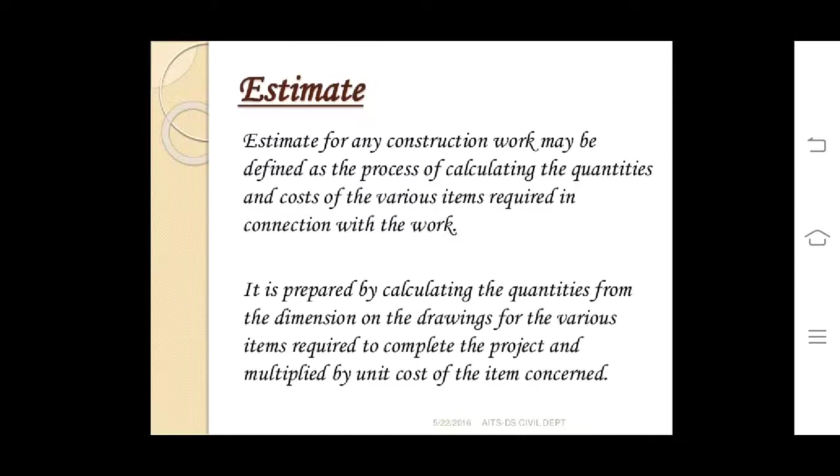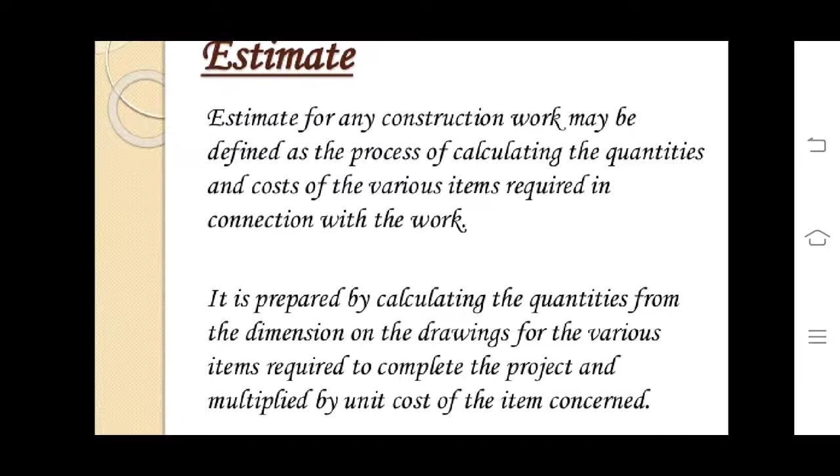Now, as discussed earlier, what is estimate? Estimate for any construction work may be defined as the process of calculating the quantities and cost of various items required in connection with the work. It is prepared by calculating the quantities from the dimension on the drawings for various items required to complete the project and multiplied by unit cost of the item concerned.

Need for estimation. The estimation is needed for ascertaining the necessary amount of money required by the owner to complete the proposed work, meaning it is required for making funds or provision of funds before starting of work.

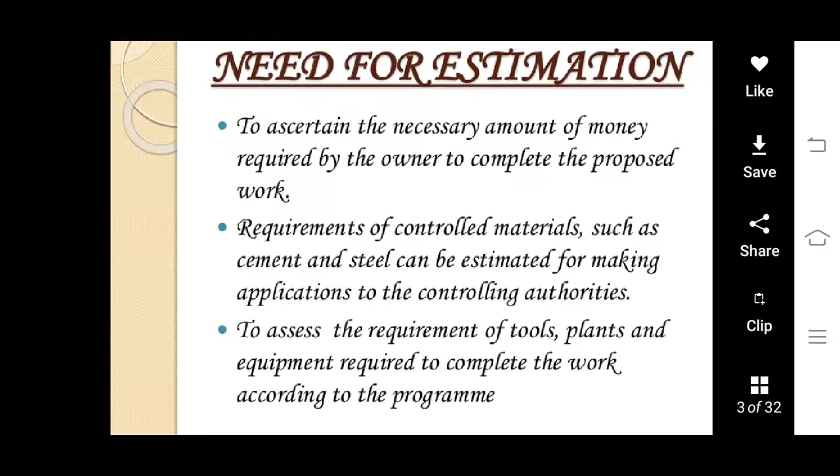Requirements of controlled materials such as cement and steel can be estimated for making application to the controlling authorities, to assess the requirements of tools, plants and equipments required to complete the work according to the program.

It is needed to fix up the completion period from the volume of works involved in the estimation. It is required to draw up the construction schedule and program and also arrange the funds required according to the programming. To invite tenders and prepare bills for the payments, the estimation is most important and plays a very vital role.

An estimate for an existing property is required for valuation. Meaning, estimation is done before execution of work or before commencement of work, and if it is after completion of work or for an existing building, it is called valuation.

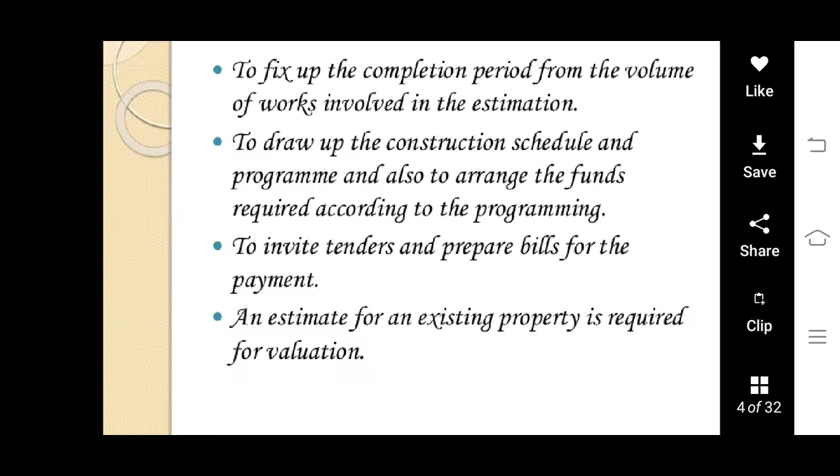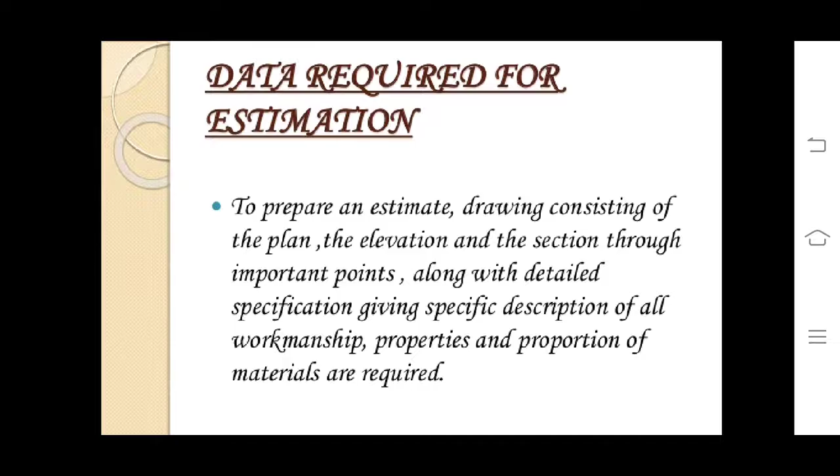Data required for estimation: to prepare an estimate, drawing consisting of the plan, elevation, and the section through important points, along with detailed specification giving specific description of all workmanship, properties, and proportion of material are required.

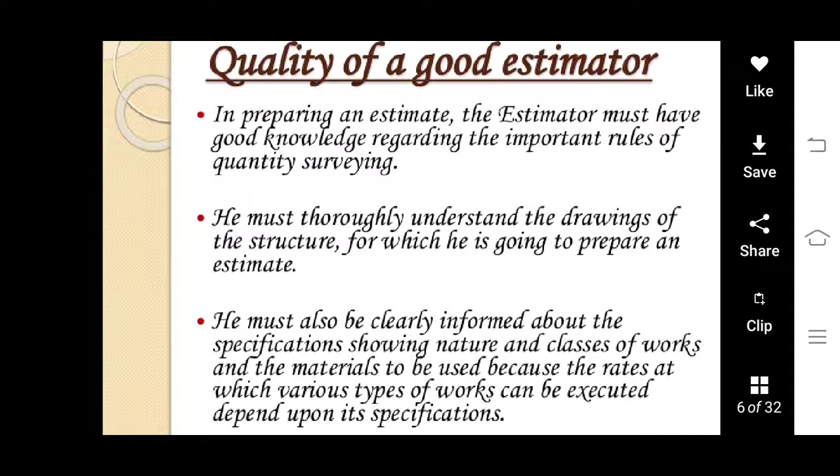Quality of a good estimator: in preparing an estimate, the estimator must have good knowledge regarding the important rules of quantity surveying. He must thoroughly understand the drawings of the structure for which he is going to prepare an estimate. He must also be clearly informed about the specification showing nature and classes of works and materials to be used, because the rates at which various types of works can be executed depend upon its specification.

Knowledge of details of construction work is necessary for the estimator. He should have experience in construction work, having information regarding the materials required, machinery needed, overhead problems, and cost of all kinds of things.

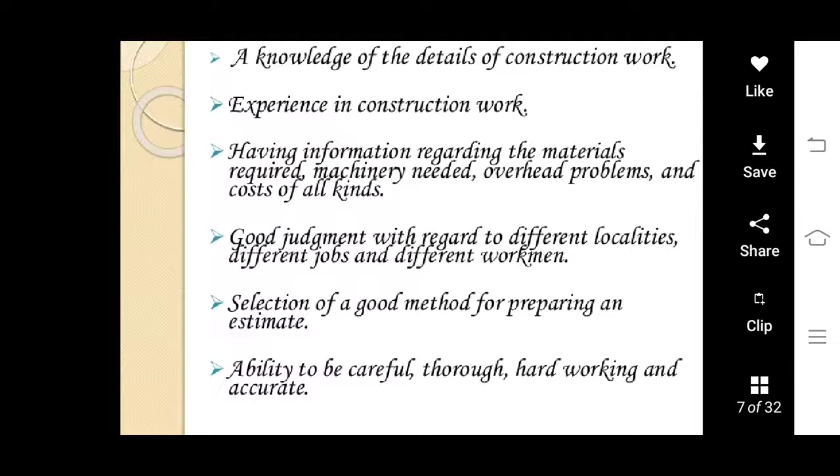The estimator should have good judgment with regard to different localities, different jobs, and different workmen. He should have good selection of method for preparing an estimate. The good estimator should have the ability to be careful, hard working, and accurate.

Before preparing the estimate, the estimator should visit the site and make a study of conditions there. For example, if the construction of a large building is planned, the estimator or his representative should visit the site and note the location of the proposed building.

Get all data available regarding the soil. Make a sketch of the site showing all important details.

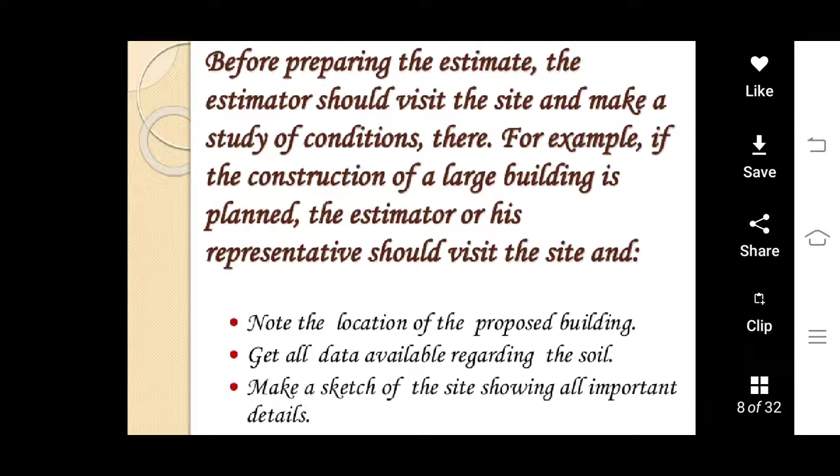He should obtain information concerning light, power, and water at the site. He must secure information concerning banking facilities for project completion.

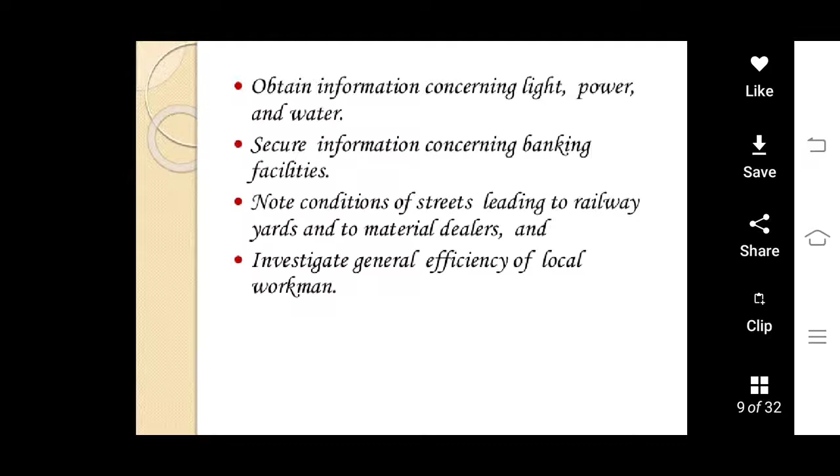He must have knowledge of the conditions of streets leading to railway yards and material dealers, etc. And he has to investigate the general efficiency of local manpower or workmen and availability of workmen and material.

There are various types of estimate, as we have discussed earlier, like detailed estimate, a preliminary or approximate or rough estimate, a quantity estimate, a revised estimate, and a supplementary estimate.

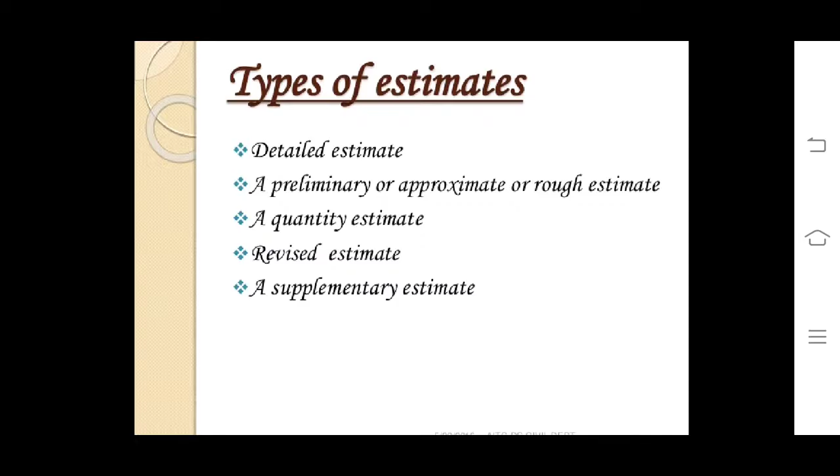Detailed estimate: this includes the detailed particulars of quantities, rates, and cost of all the items involved for satisfactory completion of the project. Quantities of all items of work are calculated from their respective dimensions on the drawing on a measurement sheet, multiplying these quantities by their respective rates in a separate sheet. The cost of all items of work are worked out individually and summarized in it.

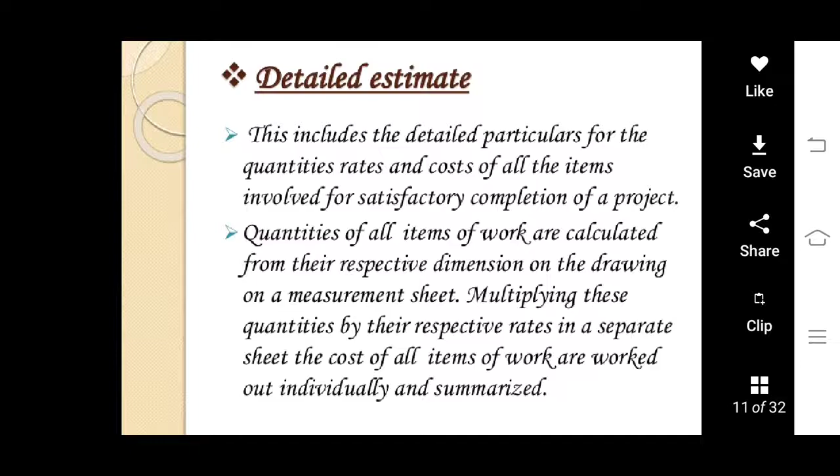All other expenses required for satisfactory completion of the project are added to the above cost to frame the total of the detailed estimate. This is the best and most accurate estimate that can be prepared. A detailed estimate is accompanied by a report, specification, detailed drawing showing plans, different sections, key plans, and basis of rates.

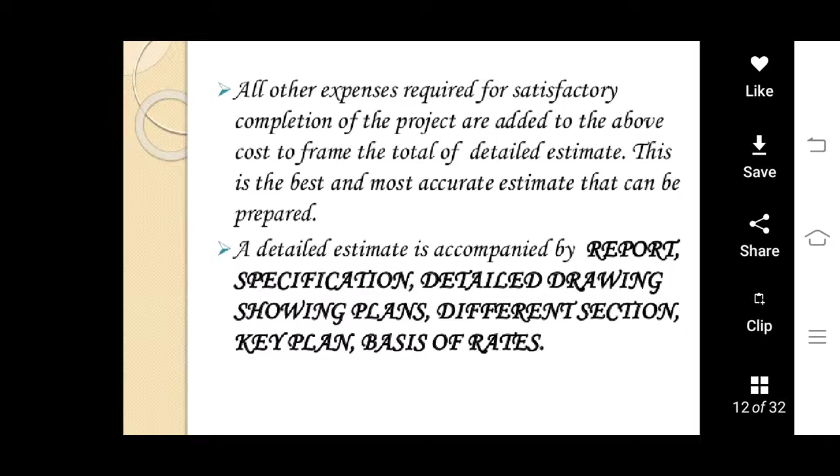Preliminary estimate: this is an approximate estimate to find out an approximate cost in a short time, and thus enables the authority concerned to consider the financial aspect of the scheme.

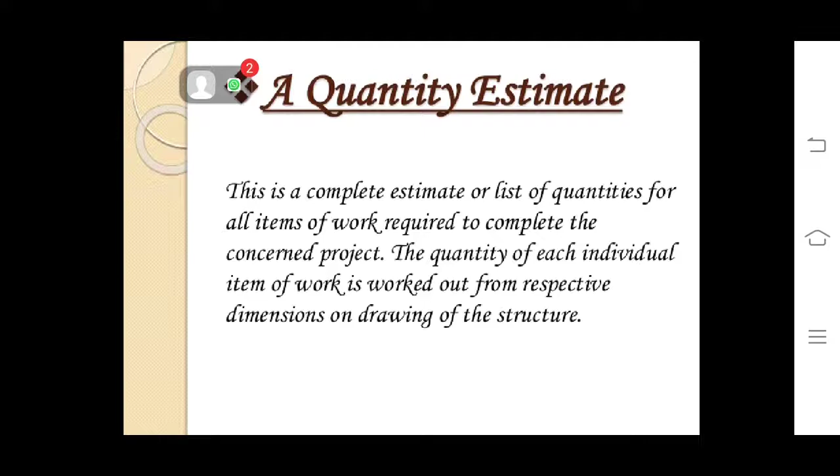Quantity estimate: this is a complete estimate or list of quantities for all items of work required to complete the concerned project. The quantity of each individual item of work is worked out from respective dimensions on the drawings of the structure.

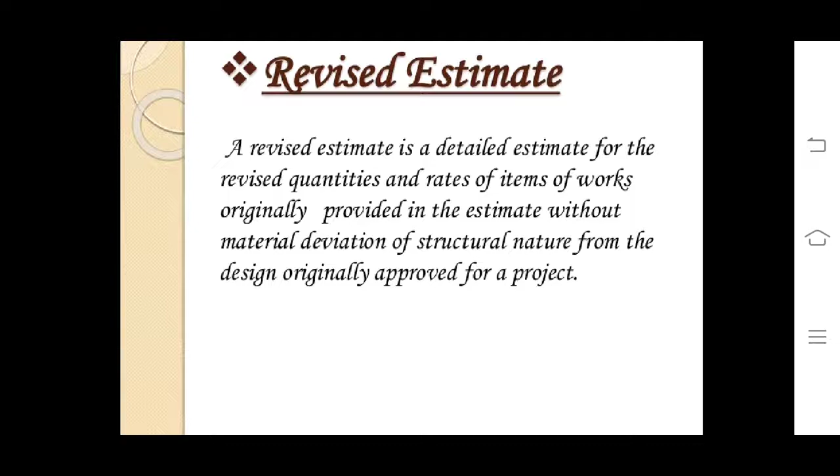Revised estimate: a revised estimate is a detailed estimate for the revised quantities and rates of items of works originally provided in the estimate, without material deviation of structural nature from the design originally approved for a project.

It is accompanied with a comparative statement abstract form showing the probable variation for quantities, rate, and amount for each item of work of the project as compared with the original estimate side by side, stating the reason of variation.

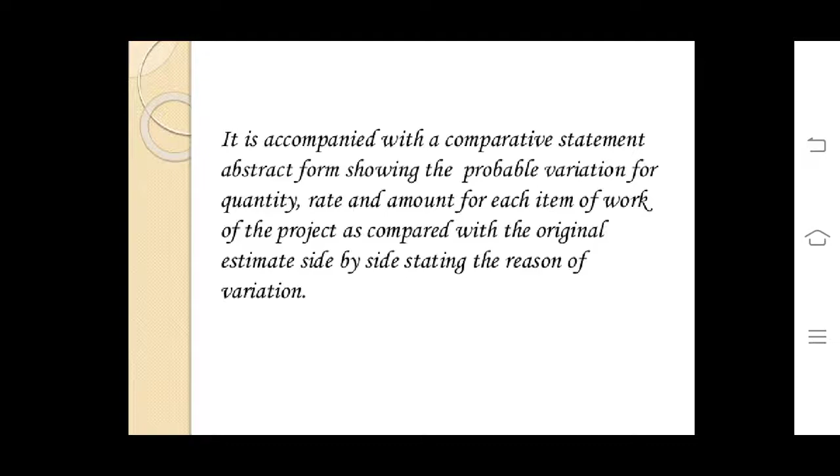It is required for the following reasons: when a sanctioned estimate is likely to exceed by more than 5%, either from the rates being found insufficient; when expenditure of work exceeds or is likely to exceed by more than 10% of the administrative approval; when it is found that the sanctioned estimate is more than the actual requirement.

A supplementary estimate covers work in progress where some changes or additional works are needed due to material deviation of a structural nature from the design originally approved, thought necessary for the development of a project. An estimate is then prepared to include all such works in it.

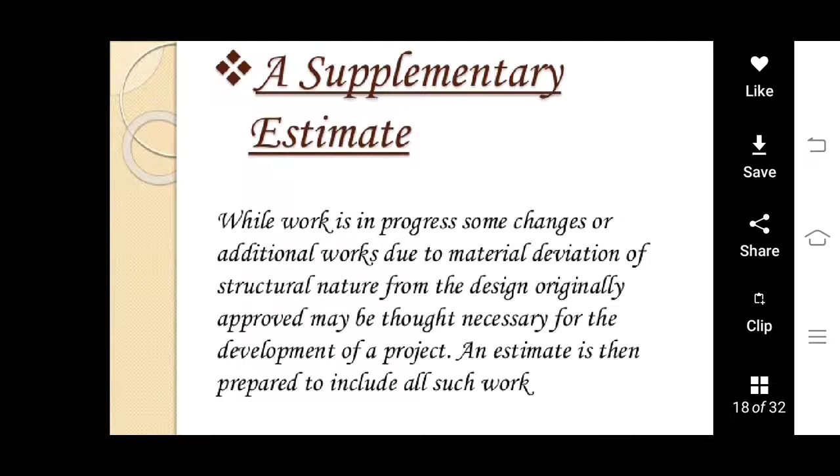How to prepare a detailed estimate? In this method, the rates per unit work of one item, including profit, are considered first, and the total cost of the item is found by multiplying the cost per unit rate by the number of units. For this, rate analysis is used.

The procedure for the preparation of a detailed estimate is divided into two parts. The first is detailed measurement, and the second is the abstract of estimated cost.

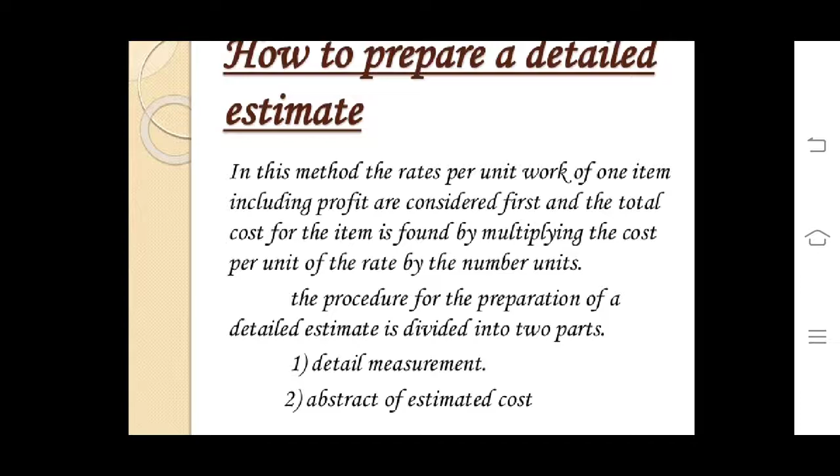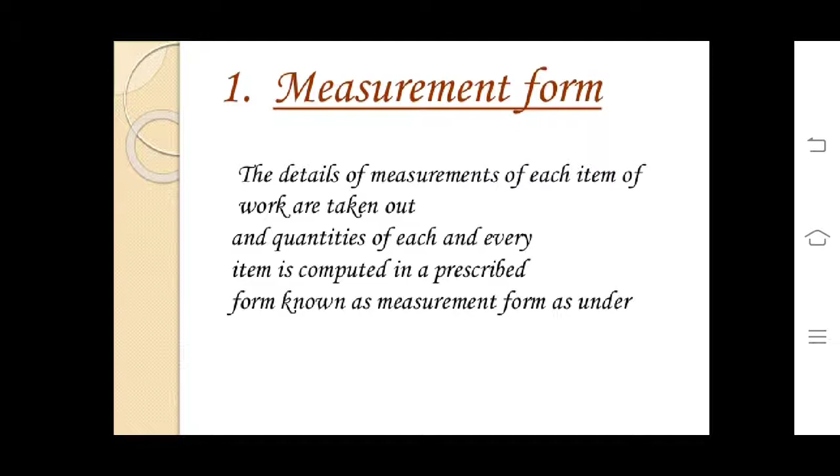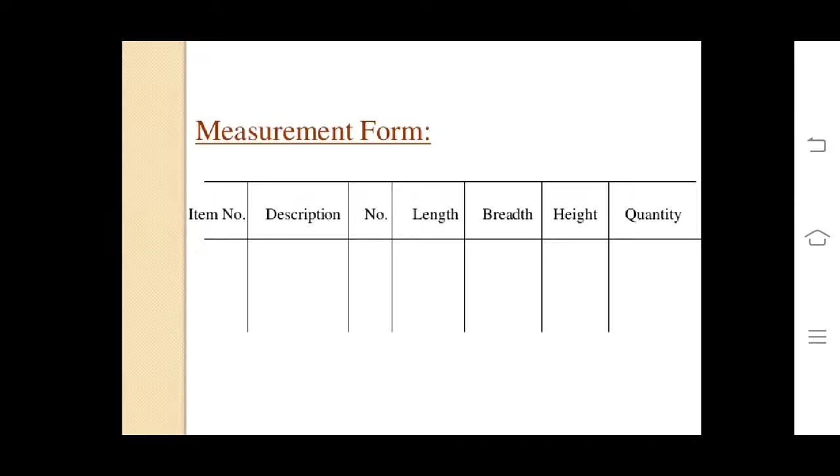Measurement form: the details of measurements of each item of work are taken out, and the quantity of each and every item is computed in a prescribed form known as a measurement form, as shown here. This format showing the measurement form includes columns for item number, description, number of units, length, breadth, height, quantity, total quantity, and remarks.

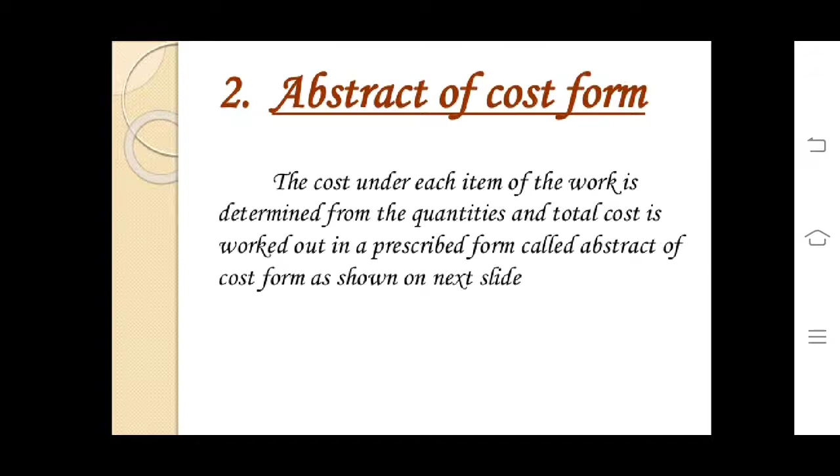There are various terms used for estimation as well as for valuation purposes, which are important in case there is a change in the cost of the project.

The first term used is contingencies. The term contingencies indicates the incidental expenses of a miscellaneous character which cannot be reasonably predicted during preparation of the estimate, and to meet such unforeseen expenses an additional amount of 3% to 5% of the estimated cost of work is provided in the total estimate.

During working there may be some issues which will increase the total cost of the project and hamper the estimated cost, for which we have to be prepared. For that, we consider 3 to 5% additional funds for completion of the activity.

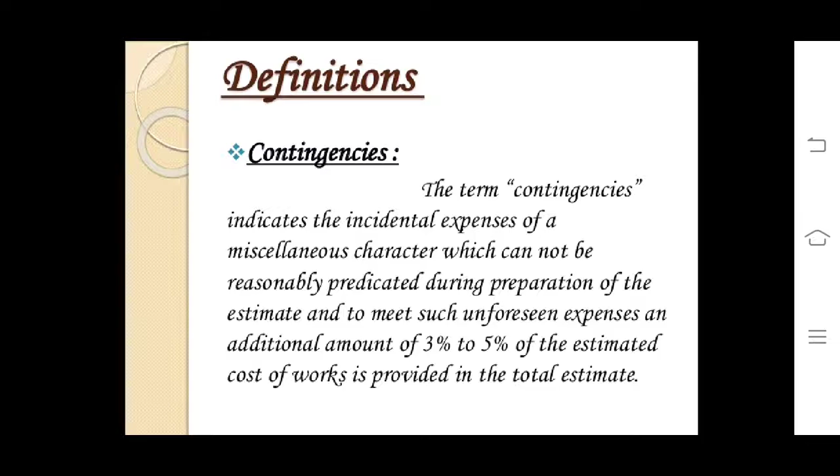For example, suppose there is an item in an estimate for cement plastering 1 to 4 with neat cement finish, but during execution it is desired to provide nosing at the end of steps. As there is no allocation of funds for this small work, the cost may be made up from the contingencies funds. This may include a change in material, change in workmanship, or any other type of problem or additional work in the project.

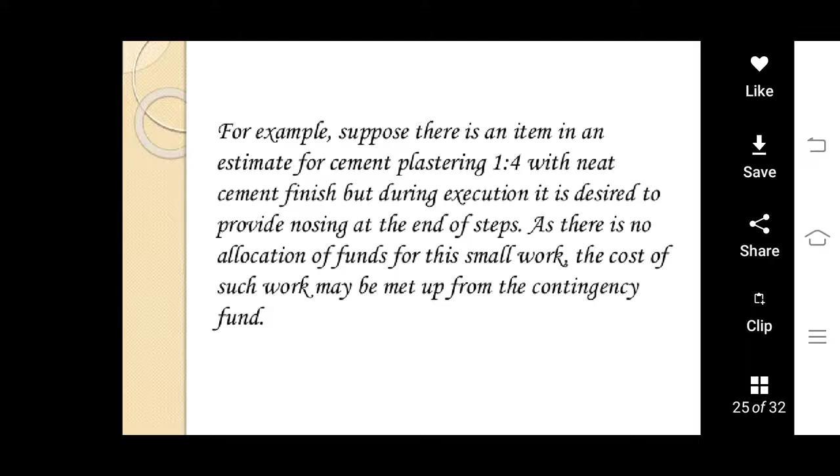Lump sum items: this is an item of work which is very difficult to measure or assess during its execution, and a lump sum rate is provided in the estimate. The work of site cleaning, dewatering from a small diameter tube well till sand-free water is obtained, removing roots of trees, etc., are lump sum items.

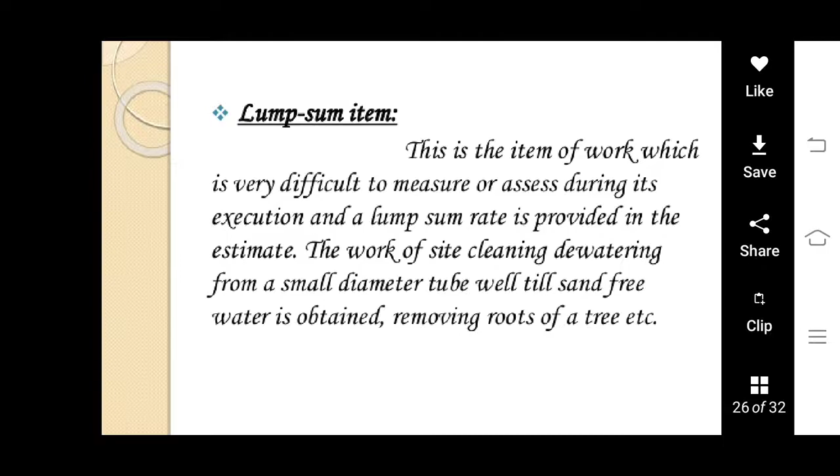The next term used for estimation is prime cost. It is the net cost or the purchase cost of an article at the shop and refers to the supply of the article only, not to the carrying out of the work.

During preparation of an estimate, it is not always possible to specify the exact type or brand of materials required, as in the case of doors and windows or water supply and sanitary fittings, according to the choice of the owner. The owner may supply such articles or instruct a contractor to purchase them for the work, with fitting and fixing charges paid separately. In order to execute such items of work, a reasonable amount is provided in the estimate as prime cost.

Day work: during execution of a project, there may be certain types of work which are not included in the schedule and cannot be paid by measurement. Those are paid for on the basis of the actual quantity of materials and labor hours required to complete the work, and this is called day work or hours work.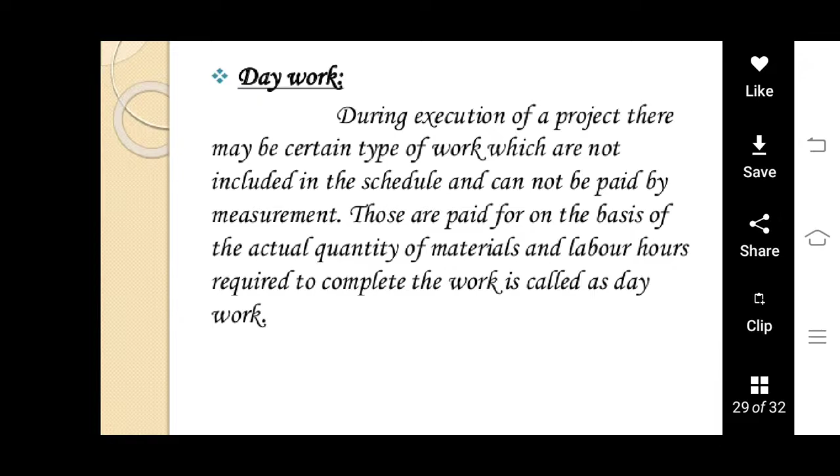The next term used for estimation is provisional sum. It is an amount arbitrarily provided by an experienced estimator in the total estimated cost of the project to carry out some special type of work whose details cannot be known at the time of estimate.

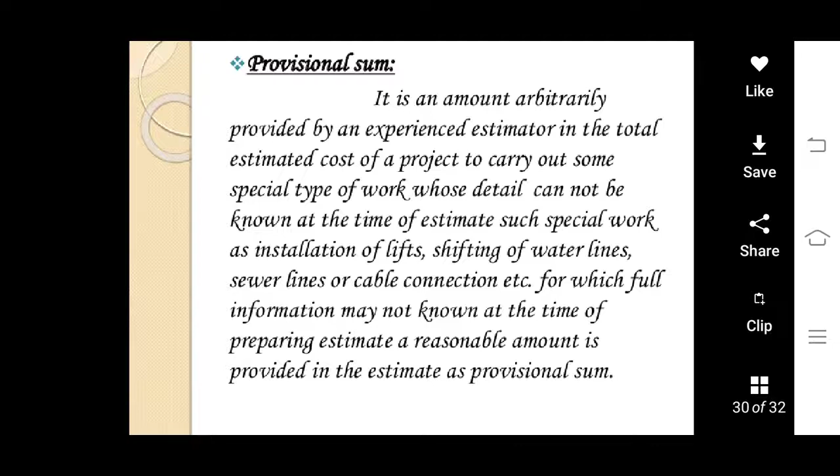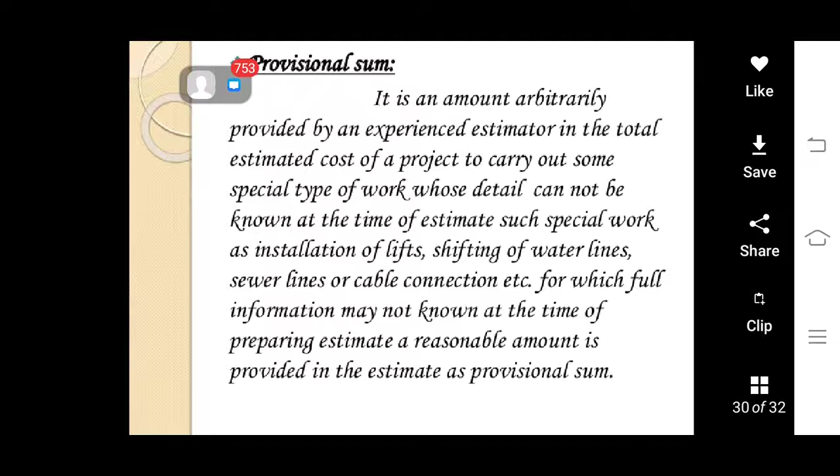Such special work as installation of lifts, shifting of water lines, sewer lines, cable connections, etc., or service provision for which full information may not be known at the time of preparing the estimate, a reasonable amount is provided or kept aside in the estimate as provisional sum.

The next term, which is most important, is provisional quantities. These are the additional quantities against scheduled items but uncertain in execution, provided separately in the estimate. During preparation of an estimate, when it is apparent that additional quantities against some item may be required due to variation of site conditions, those quantities are estimated separately from the dimensions of the drawing and kept separate in the bill of quantities under a heading called provisional quantities.

The next term used is overhead charges. This includes such items as office rent, stationery, depreciation of equipment, salaries of staff, electric bills, traveling, etc. This is usually 2.5% of the net cost of the unit rate and may rise up to 5% as per the facilities provided.